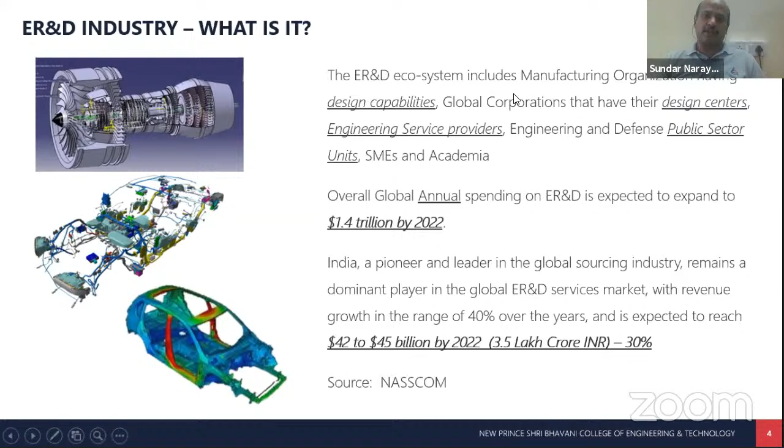I have been in this IT enabled service business for about 10 years before the 2000s started, before Y2K, when that was the buzz and computers came heavily into India. We started investing in IT related courses and engineering courses. So that's where it started.

In the 1990s, there was global spending where people outside gave projects to India, but it was piecemeal work, a contract engineer kind of project only. A company outside the country would give a small project, 1 or 2 projects, and treat us as a contract engineer only for that specific work. Most of the work at that time was AutoCAD only.

In the 90s, it was 2D PDF drawings. Legacy conversion projects - you would receive a PDF drawing and convert it into an AutoCAD drawing and send it back. To some extent there were 3D modeling software where you would model the product and send it.

Slowly in the 2000s that changed a bit into contract teams. Rather than 1 or 2 engineers, they started giving bulk projects where a team of engineers would sit and do the work and supply it back to the customer. In the early 2000s, these were kind of software-based teams - when you went to an IT service company, they talked in terms of software, like Pro-E team, CATIA team, or SolidWorks team.

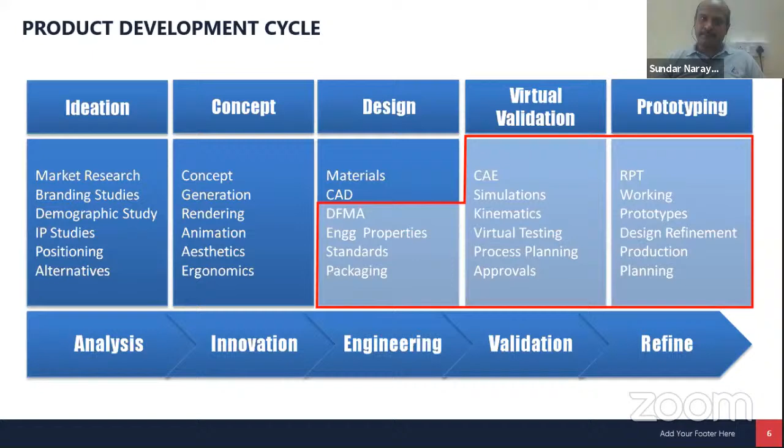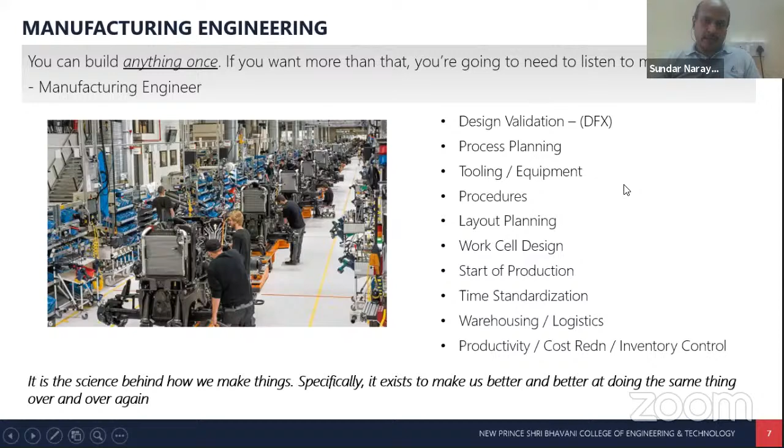I'll go to the next slide.

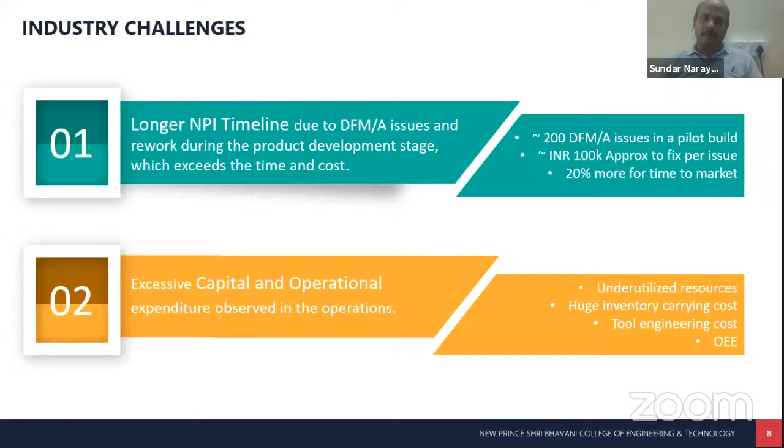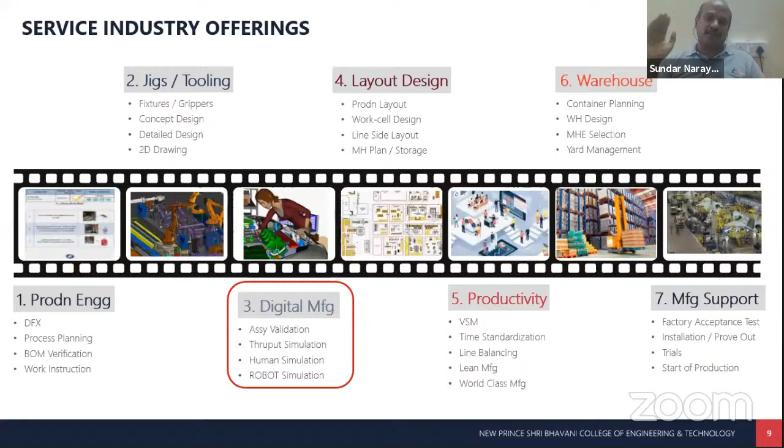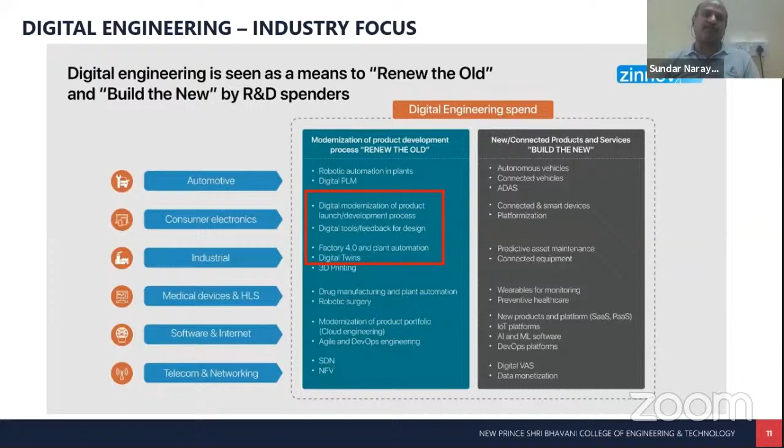So this is the industry, and in this whole area we are talking about, the next few slides we are going to discuss are on this area, digital validation only. In the plant, when there is digital simulation or validation, what kind of projects are we doing right now for global customers? That's what we are going to see in the next few slides.

Number one, animated work instruction. In any factory you need to have a work instruction in the line for the operators to read and understand what they are making. Most of the time training is given, but after that, any new operator going into the line will have questions on how to manufacture certain things, and he will take support from team leaders or senior operators nearby, or he'll be given a document on how to manufacture. He can quickly reference that, but most of the time he'll take support from seniors in the line.

With this particular offering, whatever we were previously giving as photos and Excel-format work instructions, we move into an animation. So on a 50 or 55-inch screen, I have personally seen this in countries like the USA, where there is a critical operation, a TV screen is installed at that station, and this work instruction runs continuously. So the operator regularly sees the sequence of assembly, what tool he has to use, what's the torque, and in what sequence he'll build the product. That helps in training any new operator also.

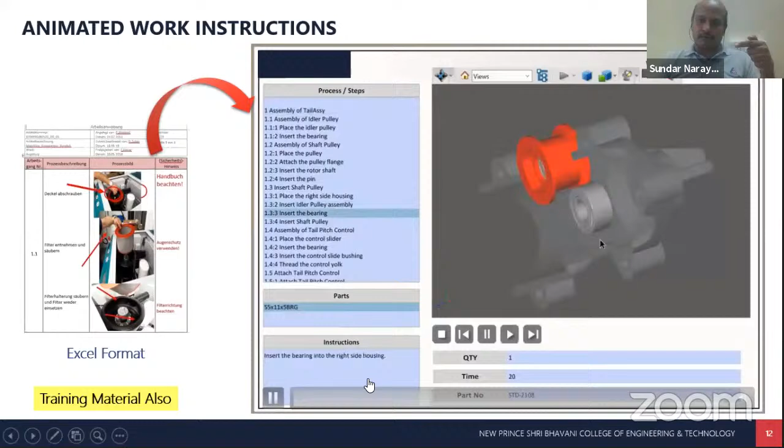So using a PLM 3D model itself, we can build this kind of animated work instruction, and we can display it in the shop floor so that the operators can understand what is my next step, and we can give the part name and everything. And we can also give what kind of tool we should use, what is the quantity, and how much time it should take to assemble this product.

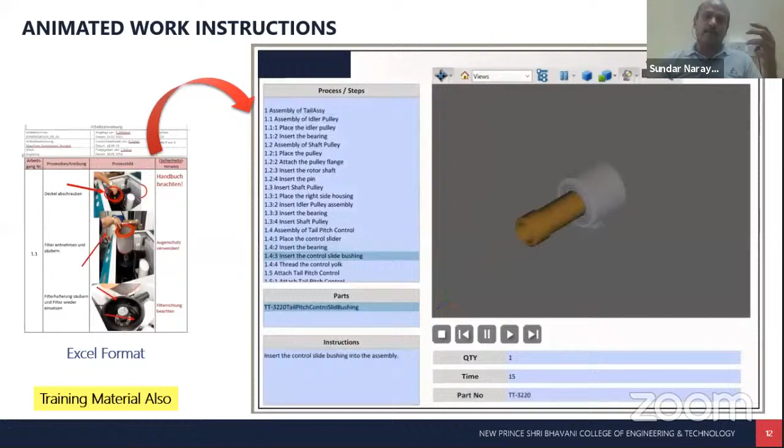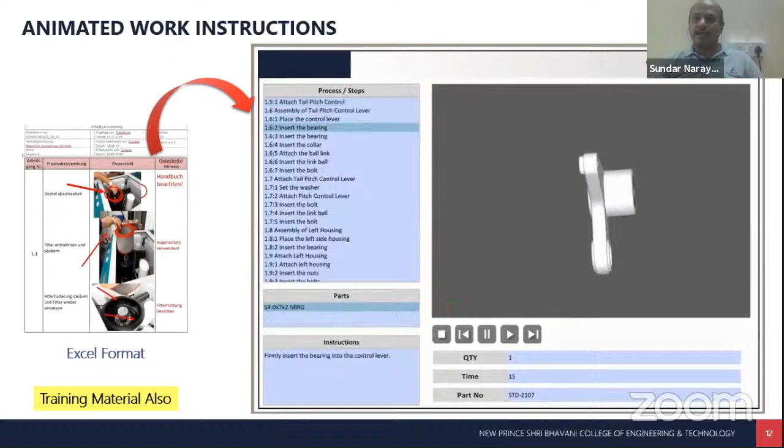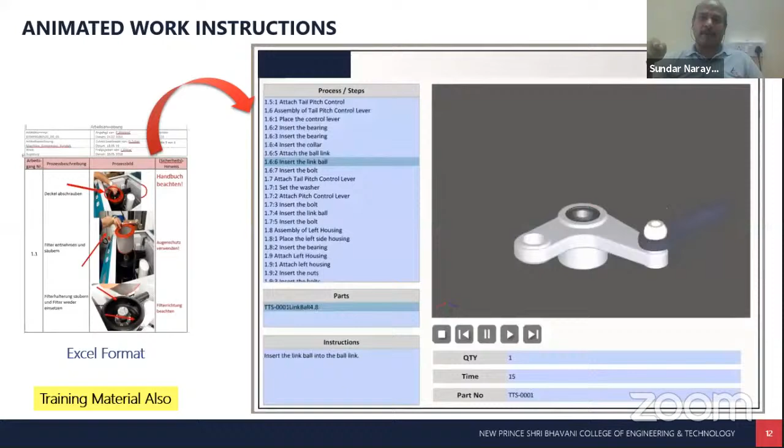All this kind of supplementary data an operator will need to assemble or work on the product will be given in an animated digital format, and this will keep on running in the factory. So it becomes easy for anybody to understand the next step without disturbing the seniors. So the productivity automatically improves. The first time right quality of the product improves automatically in the plant. So this is one of the offerings. Nowadays, many companies are slowly moving towards this.

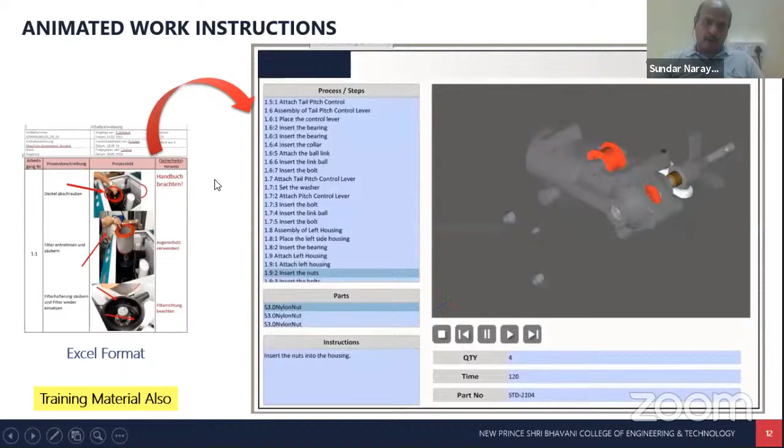This is what an animated work instruction will look like. So a process engineer should know what kind of sequence the product should follow, and he should incorporate that in a digital format and give it back to the customer. This is one offering in digital. And next, validation side, ergonomic validation. What we saw in the manufacturing engineering spectrum, we saw the digital validation part. This is one of the offerings any company does. Tools like Delmia, Tecnomatix, Jack, there are multiple tools available in the market to do this kind of ergonomic analysis.

For example, there is a line like this where an operator is working on a car assembly line, fixing some seat or something in this station. So if he regularly does this job 8 hours a day for a year or for a continued period of time, what kind of issue will he have in the body? Is the posture okay? Are we giving him the right tool to work on? So there are international standard analyses like RULA and REBA. RULA is rapid upper limb assessment, mainly focusing on his shoulder and arm, how much stress there will be on his forearms and shoulders, in this upper body area.

And REBA is rapid entire body assessment. This mainly focuses on his posture, how he is standing, how much he is bending. Is he prone to develop any issue in his back when he continuously does the job for a prolonged period of time? This analysis is mandatory for any factory that is being installed. Previously these were all done at the client location, at the site. Now since the internet is very strong, a lot of these things we can do in India and give the feedback to the customer.

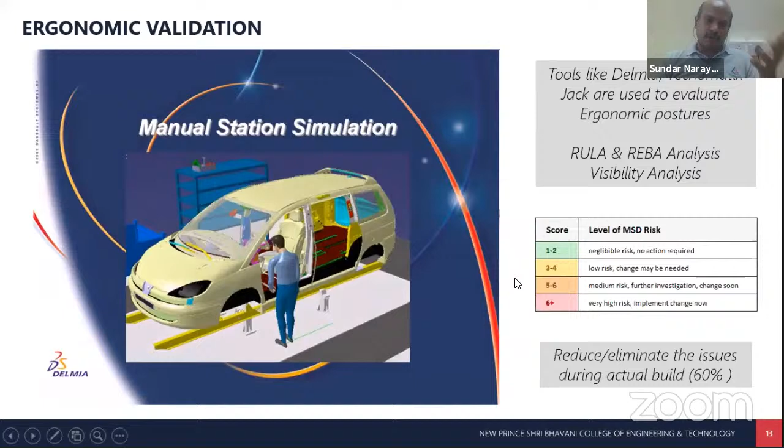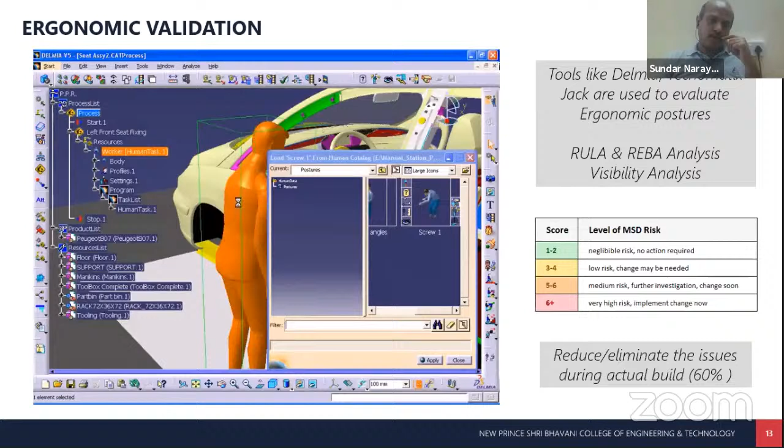So in this simulation, for example, you see he's going to fasten the seat in the car body. That's the operation. So now you bring the mannequin inside and you assign the task to the mannequin. What kind of work does he need to do? He needs to bend and use the screwdriver or spanner to tighten the bolt there.

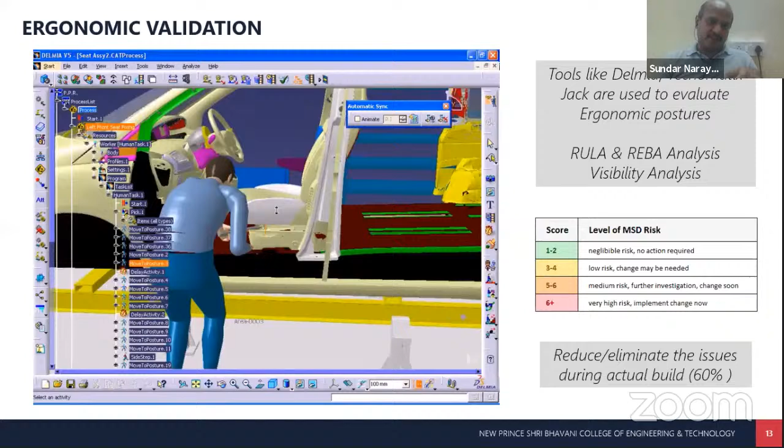So when he does this kind of activity with his posture, for his height, where are the stress points? Where is he going to be loaded? Is his shoulder going to be okay? Is his back going to be okay? All that validation will be done. And there are specific international scores available. 1 and 2 is no risk. 3 and 4 is low risk. 5 and 6 is medium risk. 6 plus is high risk.

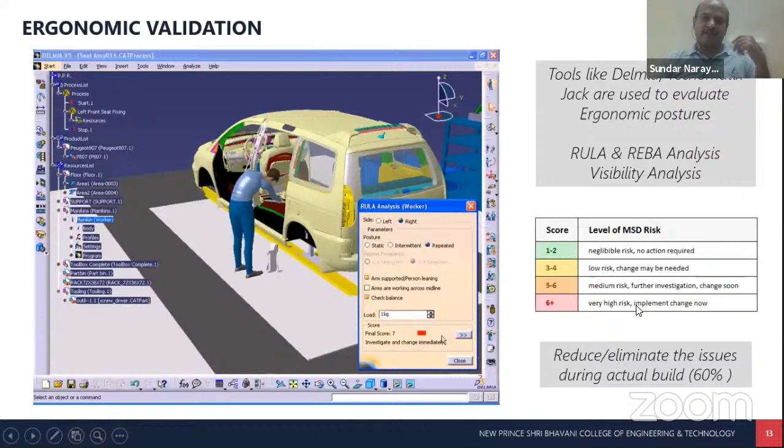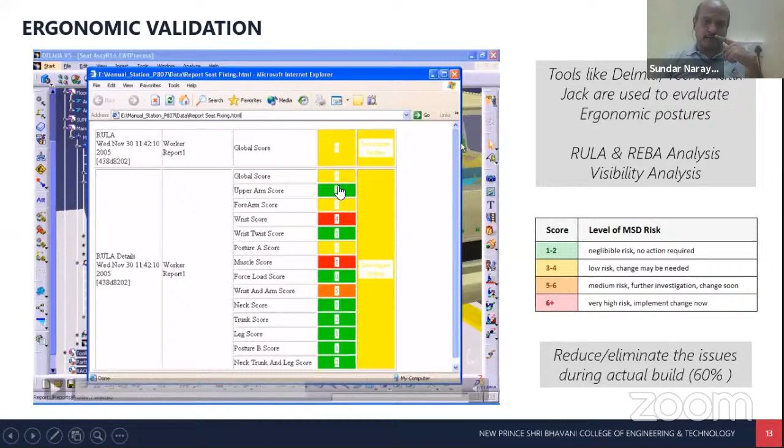See, from the color coding, you will be able to know. The software will evaluate and tell us where the workers may be stressed. If you see here the score, the wrist score is more, the muscle score is more. So in all these areas, we need to check and work on.

Another output of this validation is the visibility check. This tool also evaluates: will he be able to see the location properly in his posture? Will he be able to visualize where he has to work? From this angle, if he looks, will he be able to see this bolt itself at least? So that analysis also can be done.

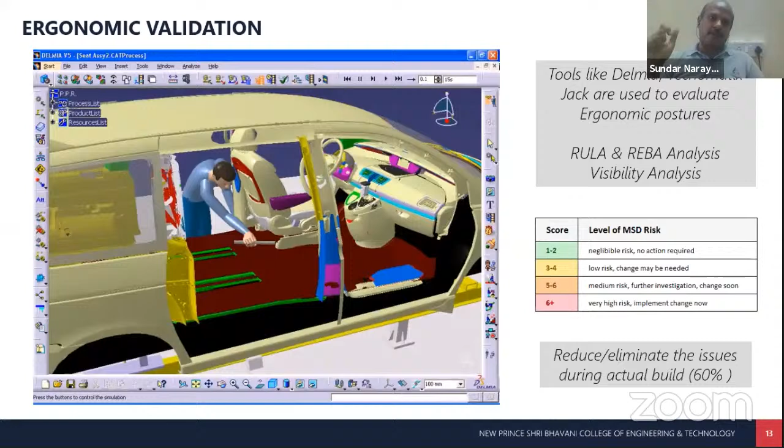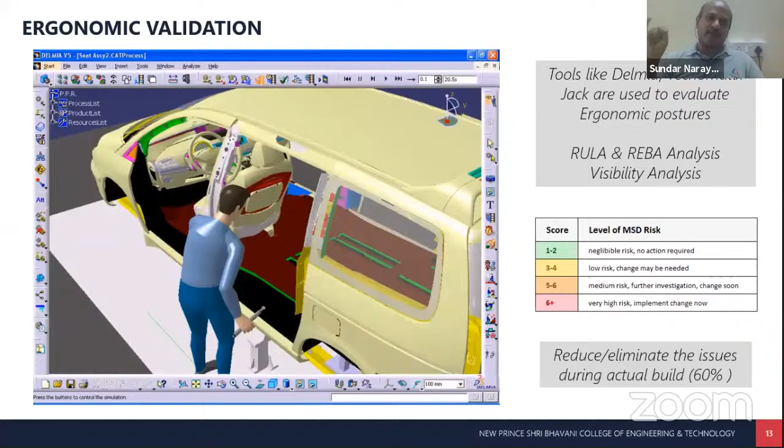Once this is done, what is the outcome? We have done this analysis and told the customer these are the areas with the issue. So this will call for multiple things. One thing is you may change the tool. You may feel that, okay, I'm not going to give him a hand wrench, I'll give him a power wrench or pneumatic operated guns to utilize. Step one, maybe. Or step two, maybe I'll change to a different fixture. I'll increase the height of the whole vehicle so that it becomes easy for him to visualize and work on it.

If none of this is possible, it may call for changing the design also. Sometimes it will go back to the design team and say that this issue is going to be a big issue when I do this vehicle in the line. So let us check and see if a design change is possible. Or is it possible to work at the previous station itself, before the top comes in? This kind of analysis is done.

So this is one of the key offerings. I have seen engineers working in the same field for about 5-10 years. This looks like a one slide presentation, but this one slide is life for many of the people in the industry nowadays. So this is how to validate by using software.

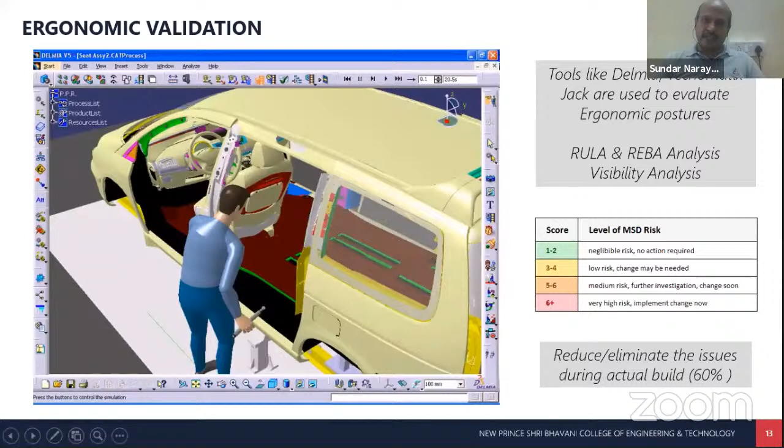The same validation can be done with the introduction of new sensors and technology in the market. There are other similar offerings: instead of bringing a 3D model inside and validating using a model, you attach sensors to the worker's body and make him perform the job in the shop itself directly, and you capture where the stress points are. This is a quicker way, but it has to be done on-site, directly in the factory. The previous one is completely digital; for a factory in the USA, you can do it in India. But in this method, you have to be in the shop to do this.

It may be costly because of the sensors and other software involved, and because it is being done on-site completely. But it can be a much quicker solution, because the previous exercise can take about a week for one engineer to work and give a solution, but this may probably be done in a day. So if somebody is rushing you for a timeline, we can use this kind of technology to do an online analysis also. But most of the time in India nowadays, the previous method is the one that is happening.

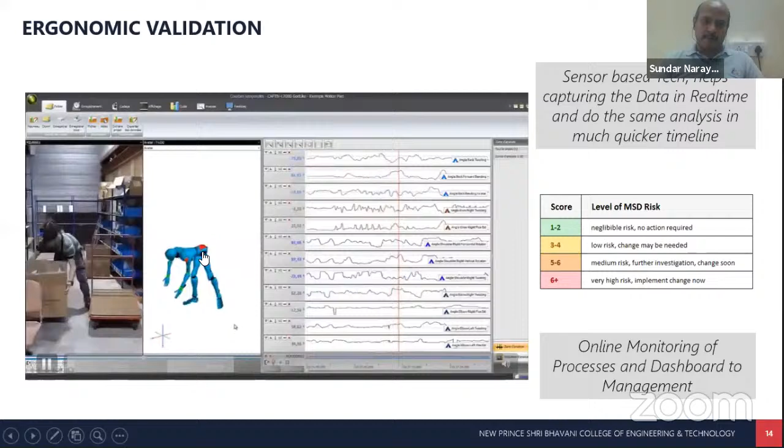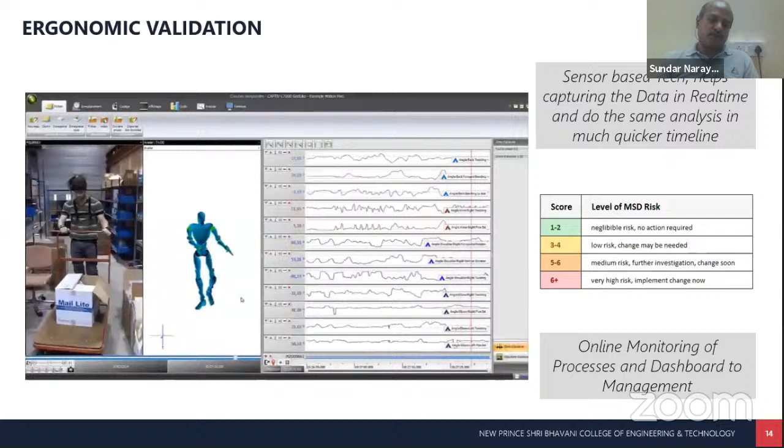I'll quickly show the video on this also, how the evaluation works. When the operator is moving, the mannequin is evaluated directly on the stress points. See, the shoulder is highlighting, the back is highlighting. These are the areas where he is getting stress. So from the score and the risk rating he is getting, we'll be providing him with additional tools, or change the work environment a little bit so that it accommodates him easily.

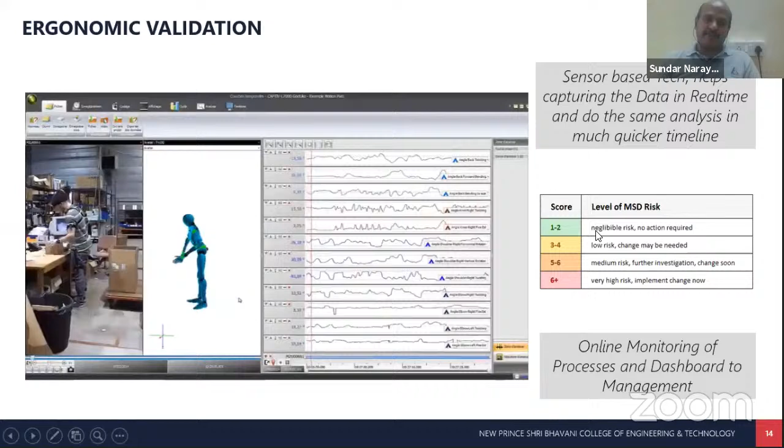So this is on ergonomic validation. Basically, when a human being and a workstation interact, how the validation happens. Next validation, what most of the industries are doing, is this one. This is very critical. A lot of companies are doing it; many of the OEMs wish for this kind of capability in any service provider.

This is one niche segment also, in which, if there is a robot available or a complete robotic assembly line, you need to design what kind of robot we need, what kind of fixtures we need, and you need to check reachability analysis further. The same kind of visibility and reachability analysis we did for a human being, we can also do for a robot. Will the robot arm be able to reach the location we want?

If it is welding, is the welding point reachable for the robot, or do we have to change the tool? So tool validation will happen, gripper validation will happen, simulating the robot. When there are multiple robots in the same station, are they going to clash with each other when the robot is running?

So when you know which robot the customer is going to use and the robot model, you can do the offline programming sitting in India itself, and you can ship the program on-site, and on-site only one engineer can load the program, run it and do a trial, and maybe do some online teaching and complete the whole project.

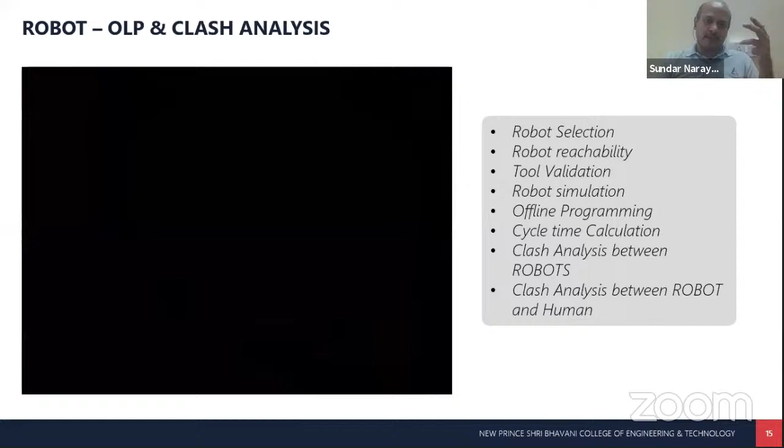So this is one example again. Most of the videos I took from online, because many of these kinds of videos are very confidential, sensitive information. So I may not be able to showcase what I'm directly doing in the company. So I looked for some similar videos online and have put them here.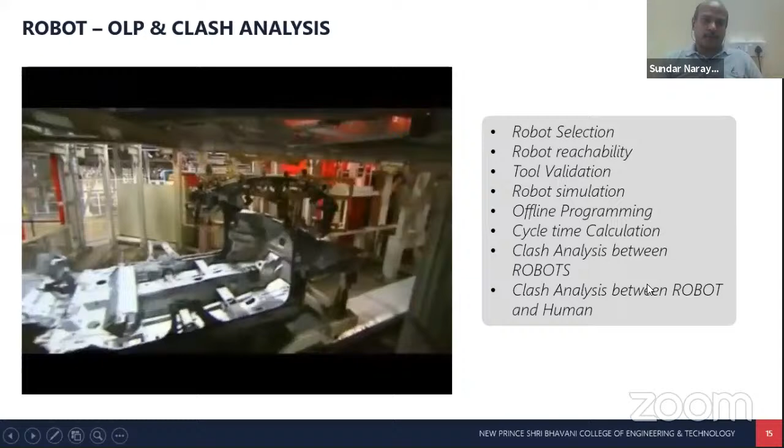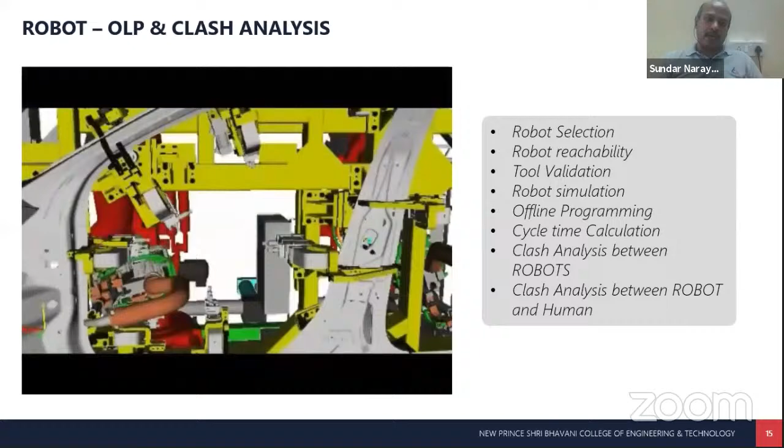This is one Volvo assembly line, welding robot, probably. I think this is a welding robot. You can parallelly see the 3D analysis they have done and the real-time working also. This video is combining both. It will show the 3D visual validation, and it will show the same robots working on the line also. So this is one bigger area for people to work on.

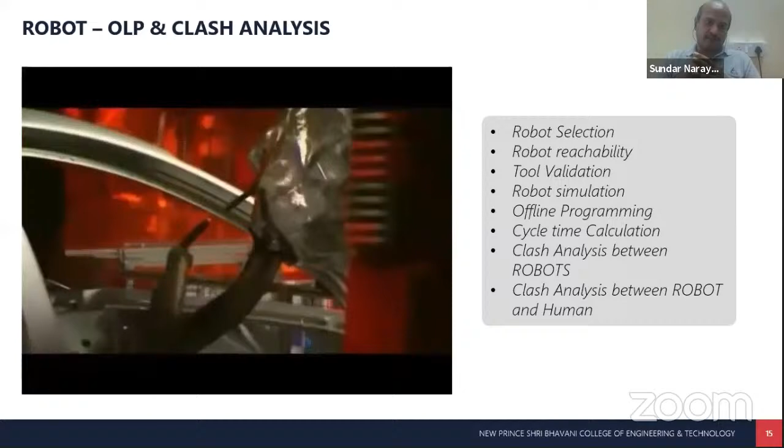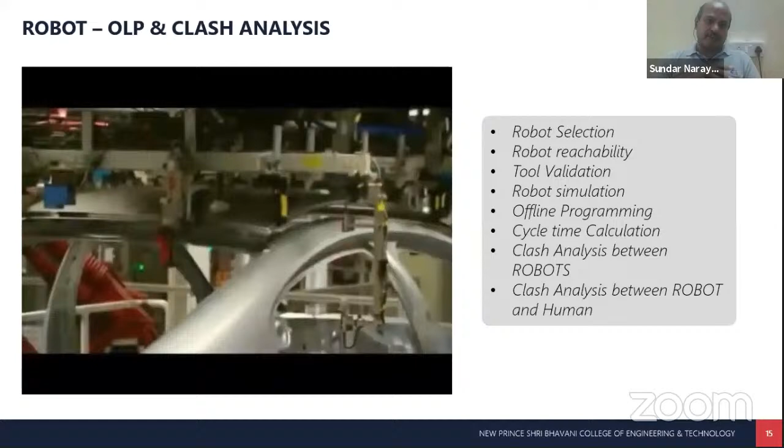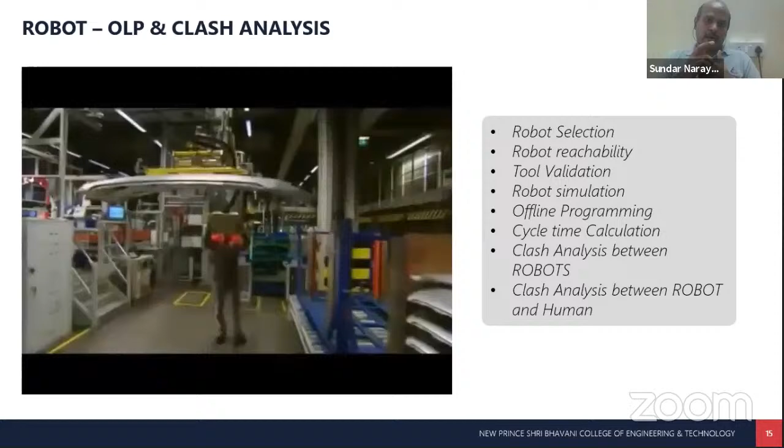Manufacturing engineering services is a very critical area, and it's a niche segment. There are not many engineers available to work in body in white welding robot analysis kind of projects. And even robot supplying companies are very few: ABB, Kuka, Magna, a few companies. So most of the bigger orders go to them, and they are always looking out for partners who can support them in these kinds of projects.

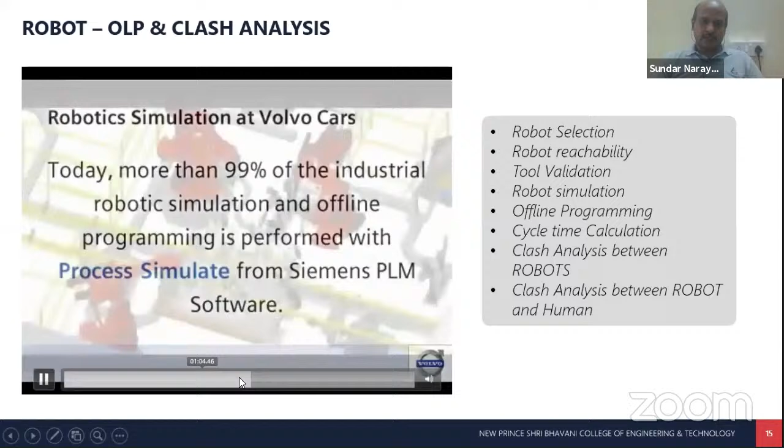So here this company claims that using their product, 99% of Volvo's validation work is being done. And this is another multi-cell robot where 3 or 4 robots are working together in the same cell. There is a fixture, and these robots are together welding the component. Here you need to do a clash analysis. When 3 robots are welding together, are they going to hit each other?

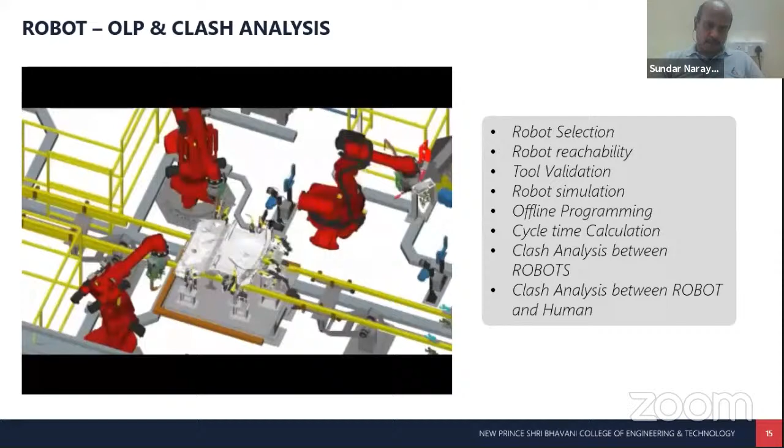So we have to plan the welding sequence in such a way that one robot does not clash with the other robot while doing its job. This is a very important validation, because it may look like a small thing, but when a clash happens between 2 robots, it will cost heavily, cost-wise and damage-wise. So this is robot simulation validation, one of the critical offerings.

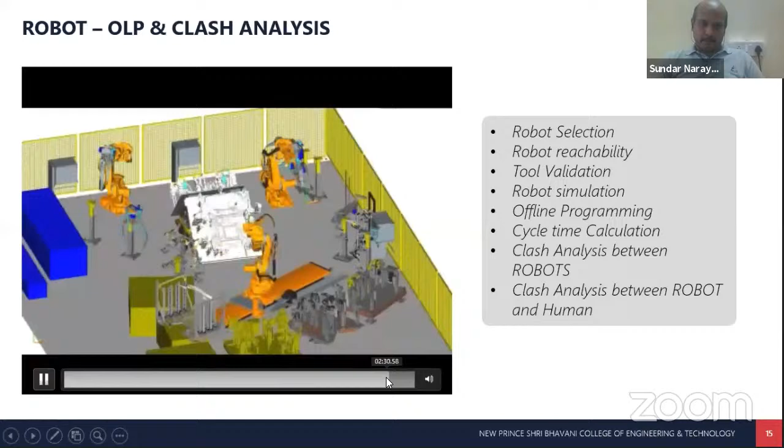So next, plant simulation. Whatever we were talking about in the previous 3-4 slides was on one station, one process, interaction between man and machine or machine and machine. Now this plant simulation is another validation. This is on a whole plant level.

From the bird's eye view, look at your plant, how the material is entering, how it jumps from station to station, machine to machine, how much time it spends on each machine, how much time it spends in a work in progress area, how much time it spends in the warehouse standing idle for the end customer to use it.

So in this analysis, we'll be able to check points like your operators' productivity, your machines' productivity, critical machines, are they utilized 100% on the shop floor, and your space utilization: is the space we are planning for the plant enough for the number of products we want to manufacture? How is our whole plant utilization, OEE, overall equipment effectiveness of your whole plant.

So this is to validate on a whole plant level, complete plant level, what kind of resources have we deployed, what is the utilization of each and every resource, and how are we going to optimize the resource.

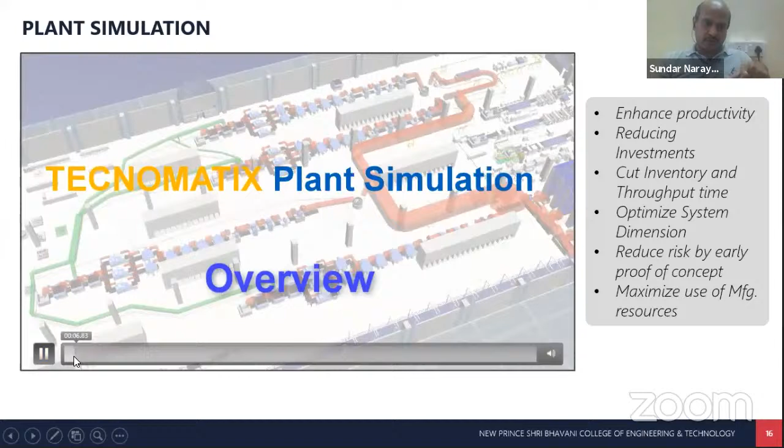So that simulation, there are also many tools available. This particular tool shown in this video is Tecnomatix Siemens Plant Sim.

So if you see, this is the whole shop floor layout. They have taken one area of the conveyor, not the whole plant, where the part enters from this side, from the pallet, and it moves through some manual stations and some automatic stations. It crosses all the stations and comes back, gets assembled, and there is a test station also. Maybe a portion of it will go to the test, remaining will go directly to the final assembly, and from there it goes out to the final.

So this whole system is modeled, and whatever small icons you see, you can give your shift calendar, how your factory is going to run, number of workers you can assign, and energy parameters reading you can do. And these small graphs you are seeing are all the outcomes. I think in this video he would have shown how it runs.

So they have built the plant, built the model. He's showing one example. So in this machine, you'll be able to give a setup time, you will be able to give recovery time, cycle time, all your process times, and you can give what are the further stations, how we should behave, where it should supply next, what's the next station subsequent to this station. All this data can be given into a model.

For each and every machine, we'll fill this data, and once you are ready with the model, you can write all the logics also, priority logics. This is how the model will run.

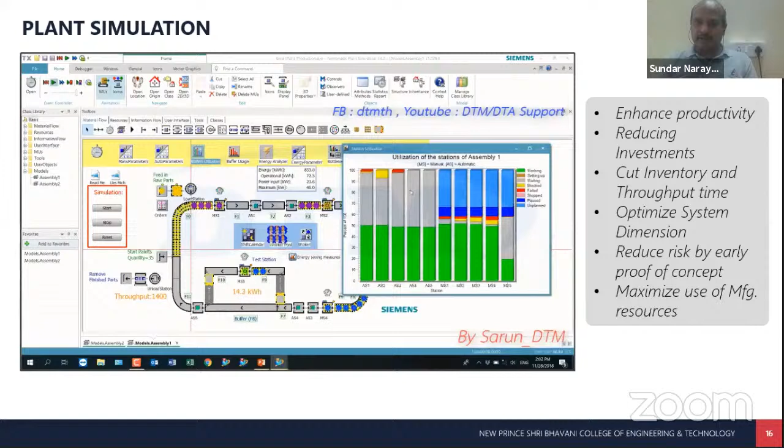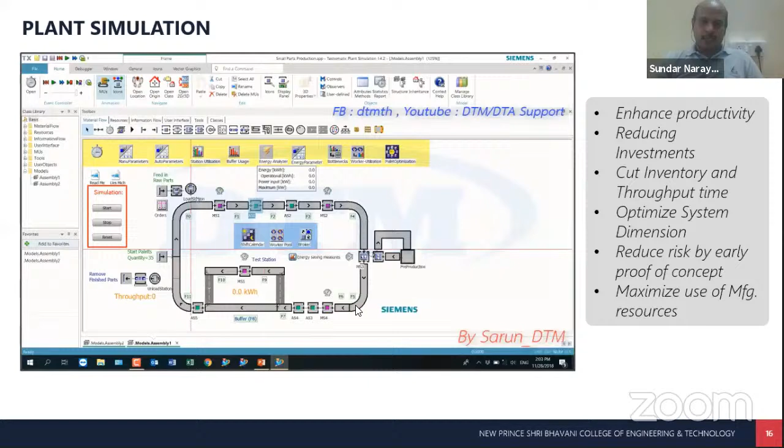So what's the advantage of this? Before even building the plant, for most of the Japanese car making factories, and for the 80 plants that I did, this analysis will be done before the product launch. Before even they think about building the line, they will ask our team to do this analysis and report on any potential issues they are going to see when the factory is being built. This way we can optimize the factory layout, we can optimize the number of workers, we can optimize the machines that we are going to use in the line. So it will make your investment very much optimal. Before even going to the real world, you can validate digitally. That's plant simulation actually.

So these are all digital simulations that I wanted you to know today.

And the benefits as such, by doing this, what is the benefit? You might ask, what's the benefit of doing all this? Overall, from my perspective, in the last few years working with automotive and off-highway vehicles, we have seen the product development time reduced by 20% by using this kind of tools effectively.

We have seen the reduction in DFMA issues by at least 65% using these validation tools. We have seen inventory getting reduced in the plant by at least 15%. Utilization of each and every resource, including operator or machine, has gone up by 20%. We have seen space reduction of at least 10% in a factory when the top management cohesively takes this up as a project and validates it as a whole.

These are the kind of advantages that an OEM can get. So inventory reduction of 15% may seem very small at a quick glance, but hundreds of crores of rupees get locked up in inventory each year in any company, depending on its size. So if you see 15%, think about the scale of savings. That becomes operating capital for the company. Unnecessarily, they are paying bank interest. All that can be brought down, and we can make the company more effective using the same workforce or the same resources they already have.

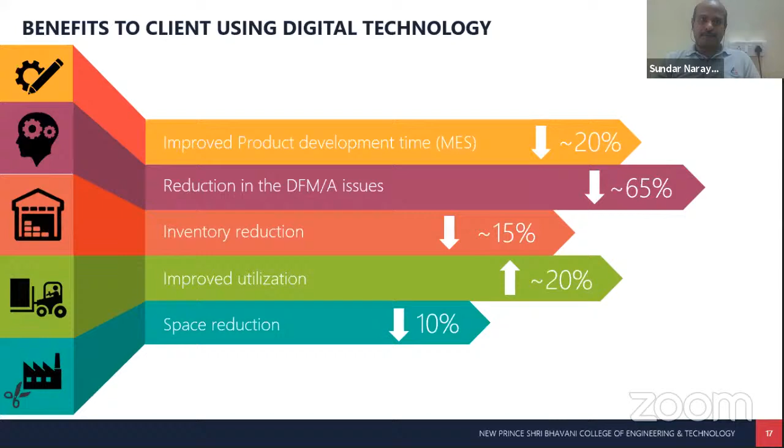I wanted to give a quick overview on smarter manufacturing. This was not today's aim actually, but up to this moment, whatever we were discussing is Industry 3.0 only, using digital software and tools and that capability to analyze and optimize a factory. Till this moment, we have not connected anything to each other.

Now, at this juncture, the whole world is moving towards that. There are a lot of sensors coming into the market that capture real-time data in the plant, what is happening, and that data can be moved to a server, and a real-time dashboard can be seen by the management at any given point of time.

So whatever input you were seeing in the plant simulation or any other simulation, till this moment it was from the customer. The customer says, this machine takes 1 minute, this machine takes 2 minutes - that was the input from the customer, till now, in an Excel sheet. But now what can happen is you can take the real input live in the plant and feed that into the simulation model in real time, make the simulation model work, let the simulation model tell us where the issue is, and do the corrective action in the real plant online.

Day to day, if you start to do this, the factory slowly becomes a smart factory. So whatever tools I have shown you in the previous slides are building blocks for an Industry 4.0 smart factory.

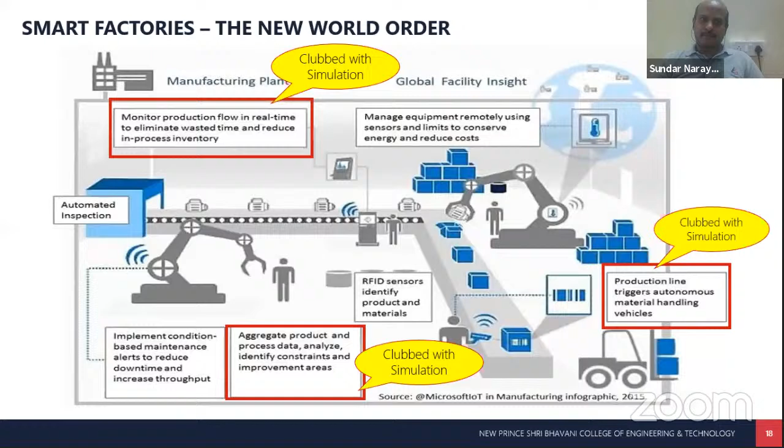That's all I had for today's discussion. And again, I am reiterating to you, each of these slides we could discuss for a week or a month - that's the size of the area that is available in this market. What I have tried to do, in these available few minutes, is give an overview idea of what is happening in the digital side of manufacturing engineering.

Now I am open for questions and discussions.

Thank you, sir. Thank you very much, sir. It was a knowledge-provoking session, gaining more from the manufacturing engineering.